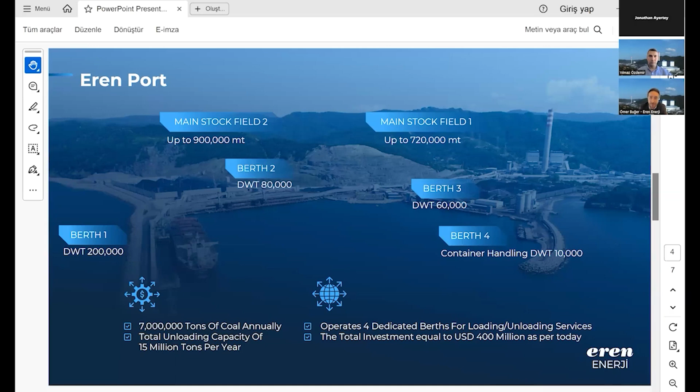Because of these power plants in the construction process, we are in touch with many different types of contractors from all over the world. Maybe more than 1,000 contractors, we have contracts with them. So it's a very tough situation to manage all of these contractors at the same time.

As an EPC contractor, we are working with the main Chinese contractors, but for the balance of the power plants, we are still in connection with other companies.

And for the last 2 years period, I have been performing a CEO role by leading the company with 1,400 employees, especially focusing on power generation, human resources, sustainability process, digitalization investments, and also the new investment areas for the power generation industry.

And in these circumstances, actually, we have very big challenges related to the operation of the power plant. One of them is carrying out the efficient and safe combustion in the boiler with the lowest emission levels as much as possible.

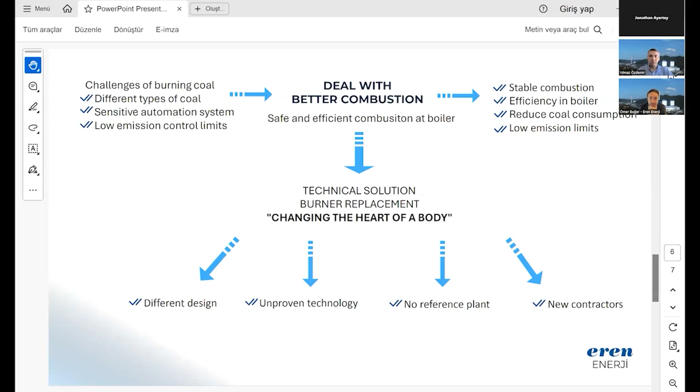Because of this risk, I will explain how we managed this risky situation - the technical risk management approach and the commercial and contractual management approach of our case.

In order to eliminate these risky steps during the evaluation period, I pushed my colleagues to be as sure as possible about the technical results, because nobody was 100% sure about the technical results at the first stage. Rather than focusing on commercial and contractual obligations, I strongly recommended focusing on the technical side of this project. So my colleagues tried to increase the probability of technical success by executing several steps.

One of these steps was inviting the technical suppliers of the tender companies to our power plant site, allowing them to investigate all the equipment and systems and make a deep technical analysis by giving them access to all data and information.

So we shared all the information and data with the counterparty, and my team and the tender company's team gathered all together in the same room, in the same power plant area, and studied together. Under the collaboration of both teams, they calculated all the technical steps together, and after the study of the calculations, they were more satisfied about the results.

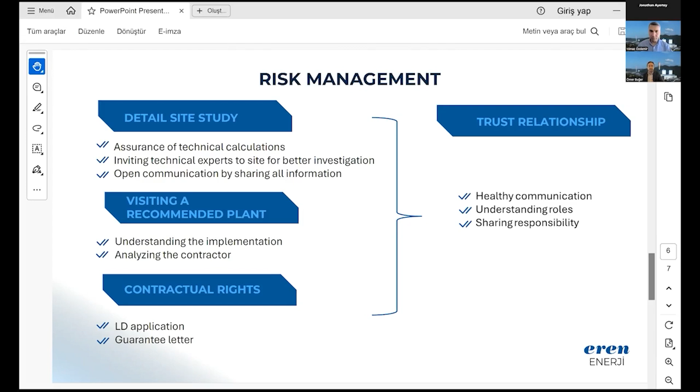This is Yılmaz Özdemir. I am Technical Director of Eren Enerji, and I will try to explain the RJM project, how beneficial and how efficient this project is. For the first part of this presentation, Mr. Mehmet Emin Balyemez will continue the presentation. He is our operation manager for the ZS2 power plant. Mr. Mehmet Emin, could you please continue?

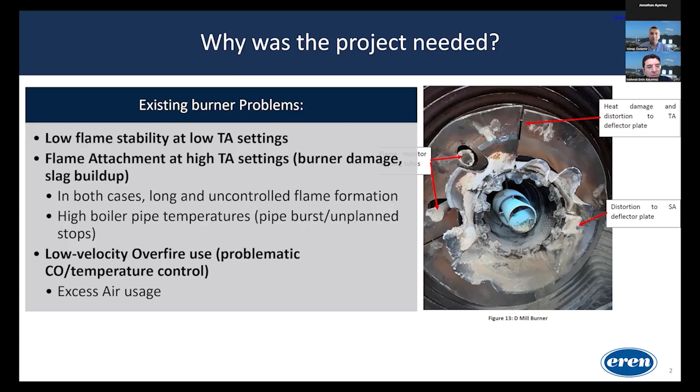Yes, we have the problems I talked about, and with the RJM burner modification, we changed the burner primary air nozzle and added a new secondary swirler. Swirling is a very important part of combustion, and flame stability is achieved using the secondary air swirler, which creates a large internal recirculation zone. The coal particles enter this internal recirculation zone and are stopped from traveling further into the furnace. The internal recirculation zone is a zero oxygen flue gas zone, where the coal releases its volatiles.

And then we have short and stable flame formation in our boiler with the RJM burner. During the installation period last year, we had so many meetings, morning meetings with the RJM supervisor, the RJM team, our mechanical team, and our operation team. We have a lot of experience with combustion and our boiler's combustion.

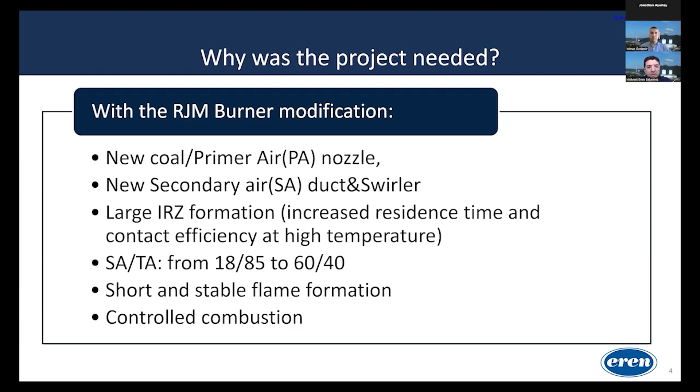After these meetings and short meetings every day, we would decide something, change something, to suit our boiler and other mechanical things. Continue please, Mr. Yılmaz.

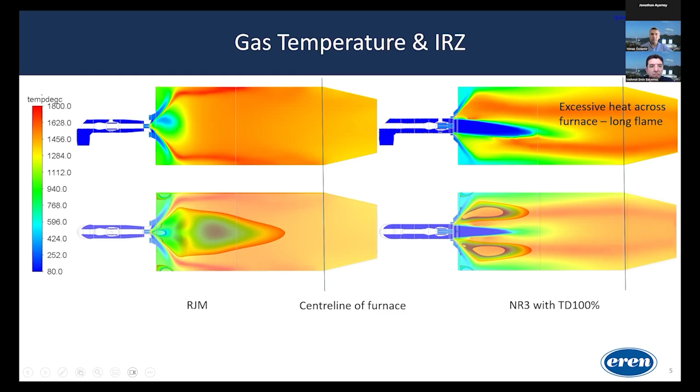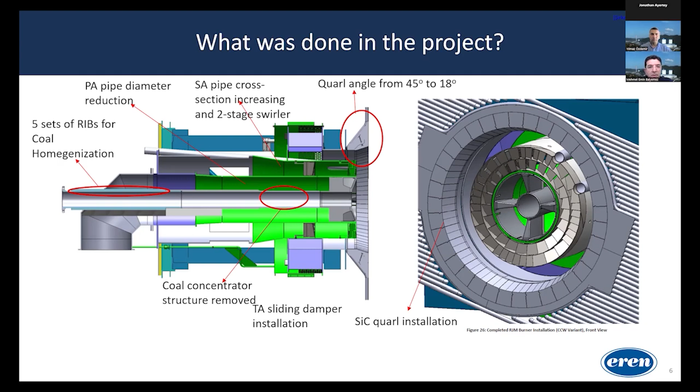With the RJM change in our burner, you can see the coal concentrator structure and tertiary air sliding damper. They installed a new design primary air pipe, they changed the pipe and the ribs to provide coal homogenization. Coal homogeneity is very important in our burners.

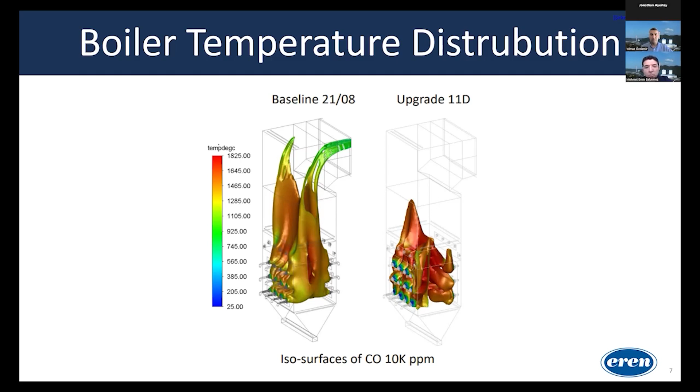This is the critical picture you can see. At the left side is our baseline test, the RGM baseline test, where we and the RGM team together saw our flame was so long with poor temperature distribution in the boiler. After retrofitting our burner with the RGM burner, our flame is now at the combustion zone as it should be, and temperature distribution is now so good. Also, carbon monoxide is better.

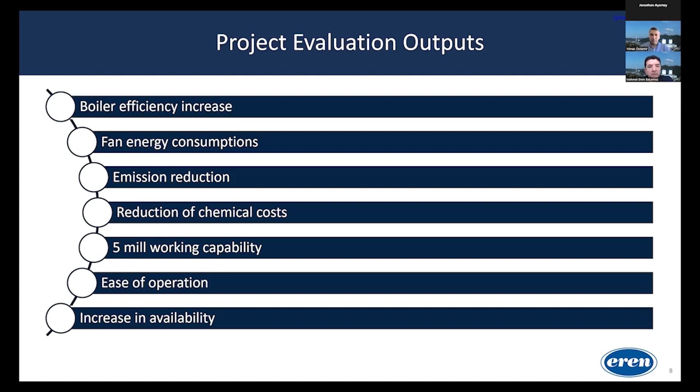So what are our outputs? Boiler efficiency increase, fan energy consumption decrease, emission reduction, and reduction of ammonia chemical used in our SCR. We now have 6 mills total but can run at 5 mills with no CO exceedance, and increased availability, which is a very important thing. Thank you, Mr. Mehmet Emin.

Now I will continue. As Mr. Ömer also mentioned, about the very important outputs of this project, the most important output is the increase in boiler efficiency of around 1.75%, and this efficiency increase benefits us around $2.9 million per year.

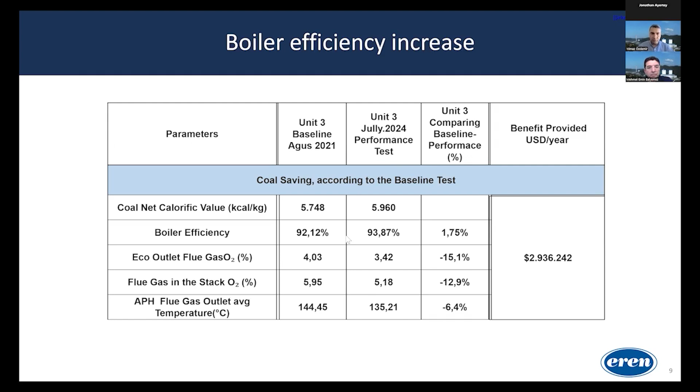How did we achieve this target? These burners provide us better combustion on the boiler side, and for this we also decreased total air feeding to the boiler. This provides equal heat distribution in the boiler, which is why the steam temperature became more stable, and that provides us better efficiency in the overall unit.

As I mentioned about total airflow, these burners can work with less air compared with the old burners. That's why we feed the boiler less primary air and less secondary air, and with this we need to give less heat to the boiler to provide enough heat to the boiler.

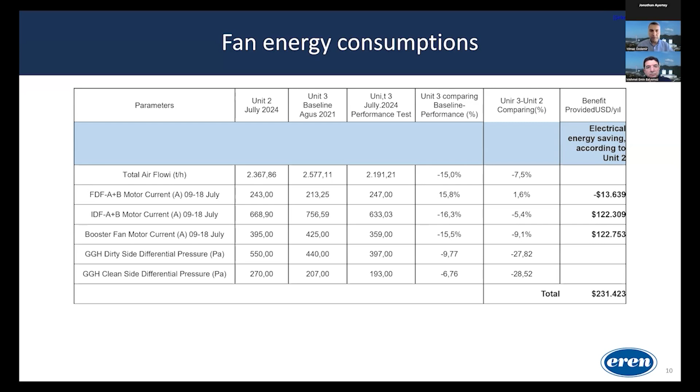When we feed less air to the combustion room, it also decreases the power consumption of the primary and secondary FD fans of the boiler. Also, since these burners are low NOx burners, the combustion distribution of the boiler is more efficient, causing less NOx and less CO emissions in the boiler.

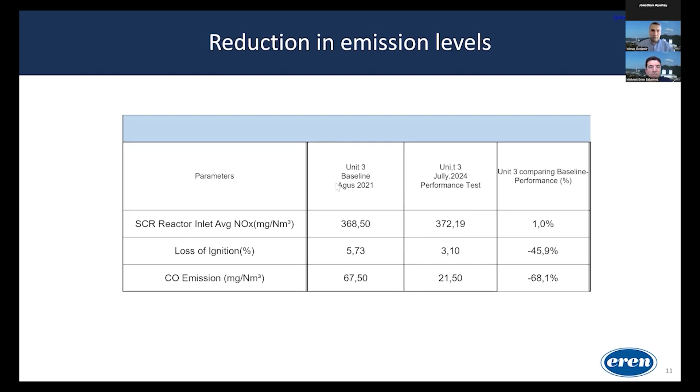This causes the boiler to produce less NOx emissions after burning, which provides us the ability to use less ammonia in the SCR system. The efficiency of the burning process means we can burn coal in a better way, and it also reduces the loss of ignition, or unburned carbon, in the fly ash after the burning process. Because of the low NOx emissions after the burning process, we consume less ammonia in the SCR system, and this saves ammonia consumption, benefiting us $234,000 per year.

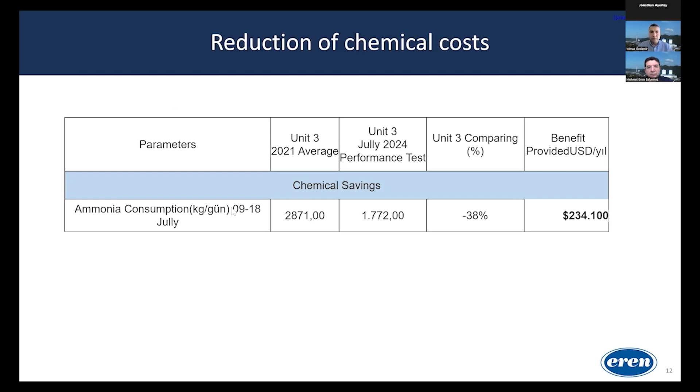Also, when boiler efficiency increased, we can reach full load with 5 coal mills, meaning we can shut down 1 mill and keep it as a standby mill. When we keep it like that, we consume less primary air and can consume less electricity for the total coal mills.

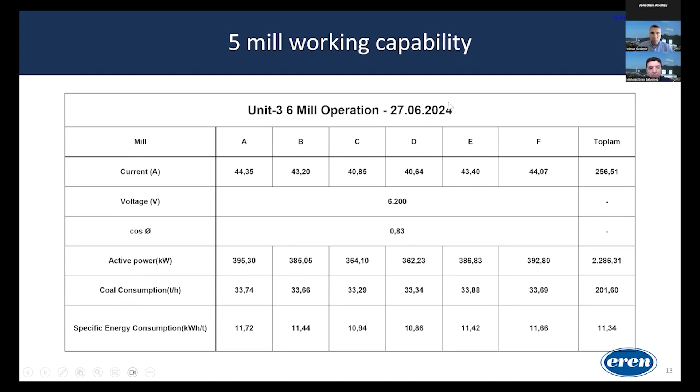As you can see, when we run the unit with 6 mills, we consume about 2,286 kilowatts per hour. But when we run with 5 mills, we consume around 2,170 kilowatts per hour.

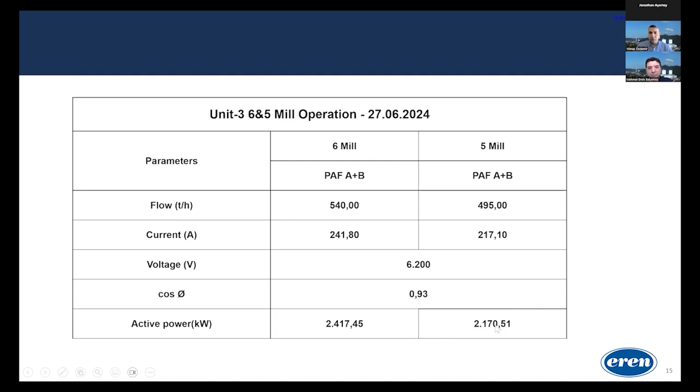When we run with 5 mills, as I said, we consume less primary air, so the primary air fan electricity consumption decreases, and the total coal mill electricity consumption also decreases. We can save around $151,000 from this operation.

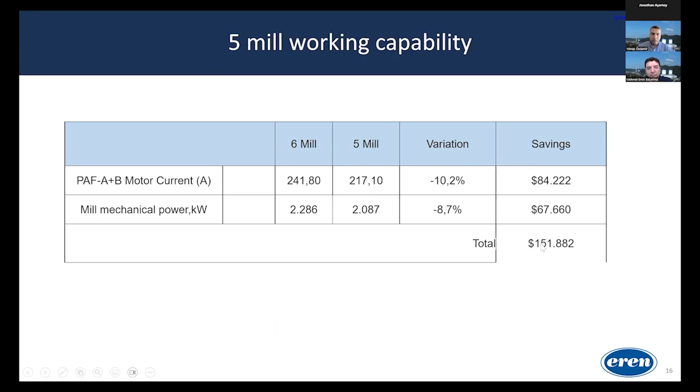With these burners, it is easy to maintain and operate compared with the old burners. Also, O2 control is better compared to the old burners. And when combustion is better, the heat transfer inside the boiler is also better compared with the old burners.

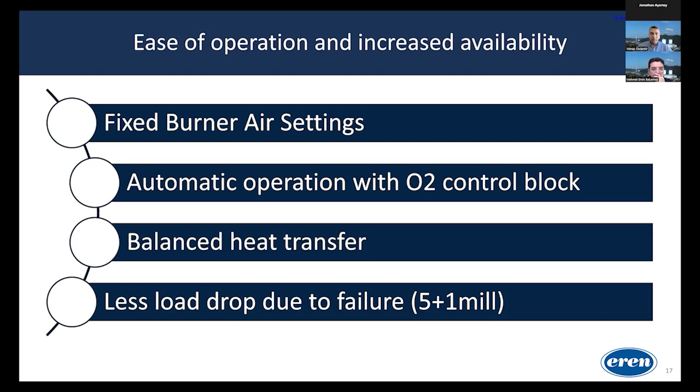When we are running with 5 mills, 1 mill is a standby. When one of the mills has a problem or other issue, we can immediately start the standby mill and continue full load operation.

And this is the total benefit of our project investment. As Mr. Ömer mentioned, the total benefit of this project is $3.7 million per year, increasing boiler efficiency, using less chemicals, and saving some electricity from FD fan, ID fan, booster fan. These kinds of improvements provide these benefits for this project.

It was really an exciting project for us, as Mr. Ömer mentioned. This is a tailor-based project, not a standard project. These burners were developed by RJM for our boilers, and as I said, these are tailor-based.

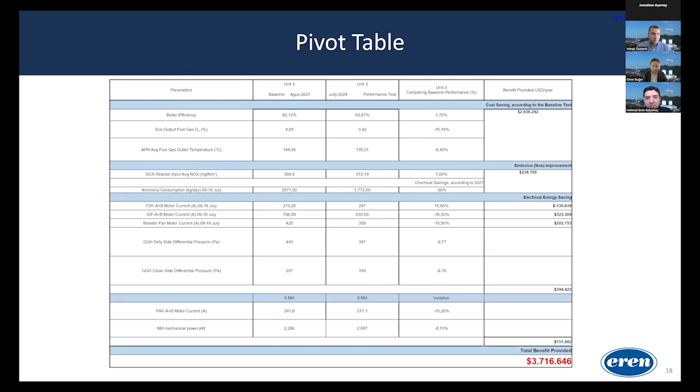Now we have a very good flame shape and flame holder in our boiler, and our flame is short, as it should be, in the combustion zone. We have no boiler pipe damage, and we have no final superheater damage in the boiler. Everything is good.